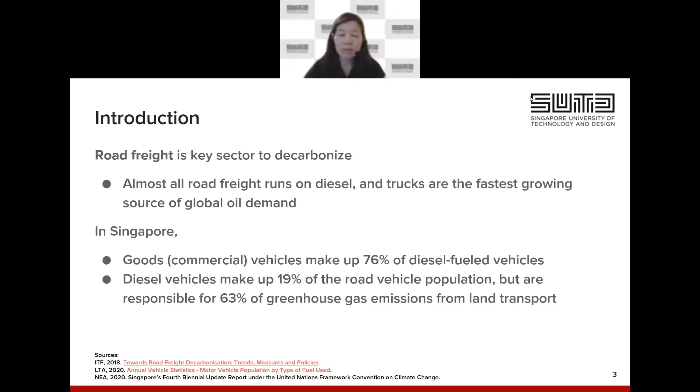In Singapore, commercial vehicles, or goods vehicles as we call them, make up about 3/4 of the diesel-fueled vehicles, and about 19%, or 1 out of 5, vehicles in Singapore are diesel vehicles. Even though they're a small fraction of the total vehicle population, they're responsible for a significant portion of greenhouse gas emissions from road transport, about 63%. So we see an opportunity here. Can we think of alternatives to switch out the use of diesel for road freight? So that's what we're considering today.

So in decarbonizing road freight, I don't know if any of you are familiar with Singapore. It's a very small city-state in the tropics, just south of Malaysia, located in Southeast Asia. We aim to phase out internal combustion engines by year 2040. For passenger vehicles, I think this is quite readily underway. The movement towards electrifying passenger vehicles is really gaining momentum. But for medium and heavy duty trucks, it's much more challenging. There are not as many obvious alternatives, partly because of the high mileage and the payloads that they have to ferry. So the impacts are not yet fully well understood.

There are studies looking at hydrogen fuel cell trucks as one of the alternatives, but there are not that many of them. And even the studies that exist maybe only focus on some aspects of the entire life cycle of the vehicle. So we see a gap here that I think deserves some attention. We also understand from existing studies that life cycle impacts of these alternatives tend to be very context specific.

So we do need to look at the specific use case, the market that these vehicles are in, how they're used before we can make a proper assessment. So here, some images on the slide right now show the battery electric concept vehicle on the left, as well as a hydrogen fuel cell vehicle on the right, both by Mitsubishi, just to demonstrate what it can be like if we were to replace conventional internal combustion engines with these alternatives.

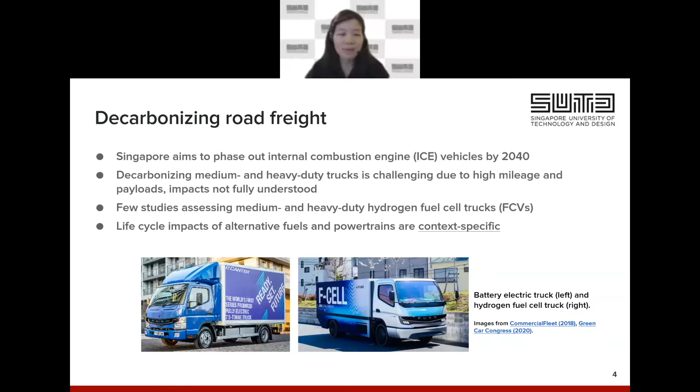So we take on a life cycle approach. And so what is a life cycle assessment? Some of you may already be familiar, but just to recap, it's a tool to help us look at the environmental impacts of a product or a system or a service throughout the entire life cycle. So we will be accounting for all life cycle stages from the raw material processing to producing the product to distributing it, using it, and then dealing with it at the product's end of life.

So this life cycle perspective is helpful because it helps us to look at the impacts of alternatives relative to baseline or the best practice today. And we take that approach because we are interested to avoid the issue of problem shifting or creating new problems as a result of the introduction of an alternative.

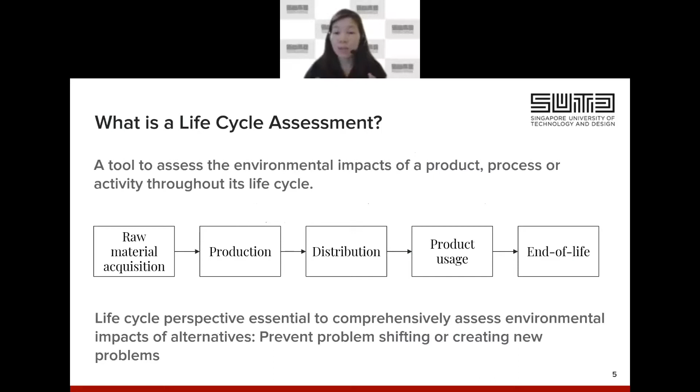So the ISO has come up with a framework for how life cycle assessments can be conducted. It usually begins with a goal or a scope definition where we define why are we doing the life cycle assessment, who does it serve, what should we include or not include within the scope, and then after that, a very careful inventory analysis. So inventory analysis would account for the material inputs or resource inputs into all the different life cycle stages that's considered within the scope. What are the emissions? What are the wastes or byproducts? Or what is the end product?

And then some inclusion of the impact categories to consider. So for today's topic for the trucks, we're looking at greenhouse gas emissions, which concerns climate change. But there are many other impact categories like impact on human health or ecotoxicity. So there are different categories that we can think of for the specific study of interest. And then throughout that, we will be interpreting the results and again, considering who is the audience, what purpose does the study serve, be it for design improvements or for policy making, for marketing, and so on.

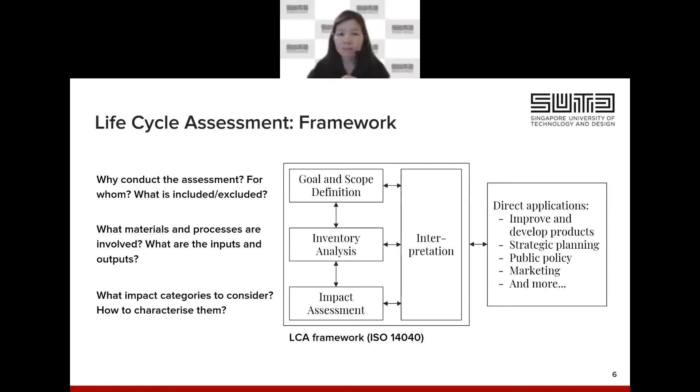So for the purpose of our study, which is to look at greenhouse gas emissions for trucks, these are the alternatives that we will be considering. We're looking at the conventional diesel, and we'll be comparing hybrid diesel to that, as well as a battery electric truck and hydrogen fuel cell truck. So we've actually selected these alternatives because we think they're the most promising in Singapore's market. So we did not consider others like, for example, natural gas CNG vehicles or biodiesel. And then again, we're looking at these medium-duty trucks weighing about 3.5 to 7 metric tons.

We're looking at the case of Singapore, where it's a very dense urban environment. We don't really have a lot of renewable energy sources available, so a little bit constrained in that context. We will be measuring the greenhouse gas emissions on a life cycle basis on a per ton kilometer metric. So this is per ton and kilometer traveled, right? So this is the utility or the service that the trucks will be performing.

In terms of data, the life cycle assessment studies are very data hungry. So we will be using existing LCA databases such as GREET that's offered by Argonne National Lab. We'll be using some of the information from existing literature, past LCA studies. Wherever available, we'll try to use the local data. The figure on the right shows the scope that this study is undertaking.

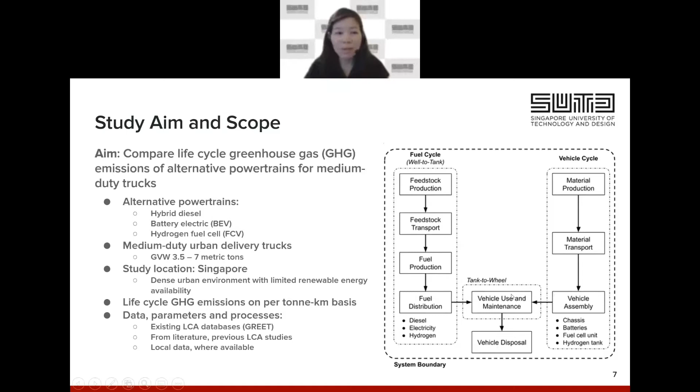So when we think about trucks, it's bringing together actually two products. You have the fuels that have to be produced, and it goes through a chain of activities, like the feedstock has to be produced, it has to be transported, and then eventually distributed, be it diesel or electricity, or the vehicle itself has to be manufactured, assembled, transported to the end user. And during the use phase, which is in the middle over here, or the tank to wheel portion, the vehicle is operating, it's being maintained, and then eventually reaches its end of life and will be disposed. So let me break down these three stages of the life cycle a little bit in more detail.

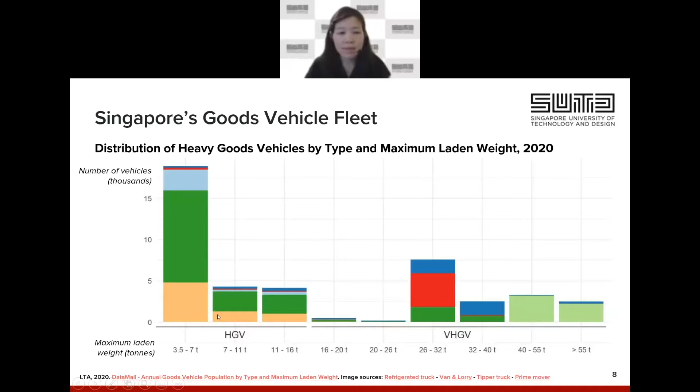So here's a distribution of the goods vehicles in Singapore by weight categories as well as the body types. So just wanted to set context that we're focusing on this part, the kinds of vehicles that's more prevalent in Singapore. So these are the ones weighing 3.5 to 7 metric tons, having a body type that looks a little bit like the one over here. So it's either open top or enclosed box kind of trucks.

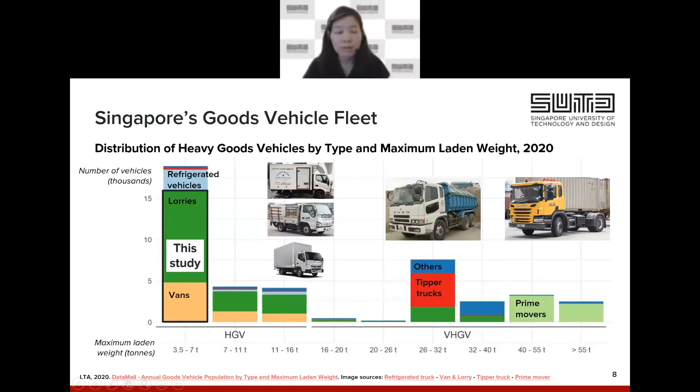So in terms of the vehicle cycle, this is the portion where we are looking at the manufacturing of the vehicle itself. The chosen body type is the Mitsubishi Canter, which is a very common heavy goods vehicle model here. Notice that in any LCA study, again, for your context, you'll be looking at the typical vehicle types. We've selected equivalent models for each powertrain of interest, so this would be the hybrid electric vehicle as well as the fuel cell vehicle.

For a fair comparison, we've made sure that the specifications and the configurations of these vehicles are similar, so similar power output and performance across these alternative powertrains. And during the modeling process, we assume that they're carrying the same payload. Greenhouse gas emissions are emitted during the vehicle cycle when we're manufacturing the vehicle. You can also get credits when you're recycling the vehicle when it reaches its end of life.

So we'll have to account for all the key vehicle components like the body of the vehicle, the battery for the hybrid or the electric vehicle, the fuel cell unit, as well as the hydrogen tank for the fuel cell vehicle. Most of these emission factors are obtained from the literature where available, such as, for example, for battery capacity, the kilograms of CO2 equivalent emissions per kilowatt hour of battery capacity. So we'll have that factor and we'll account for that based on the specifications that we've chosen.

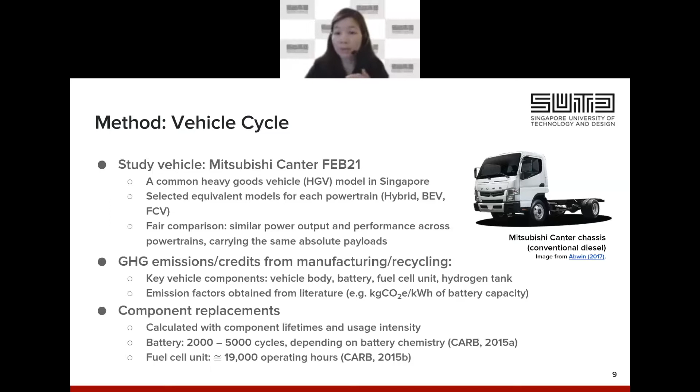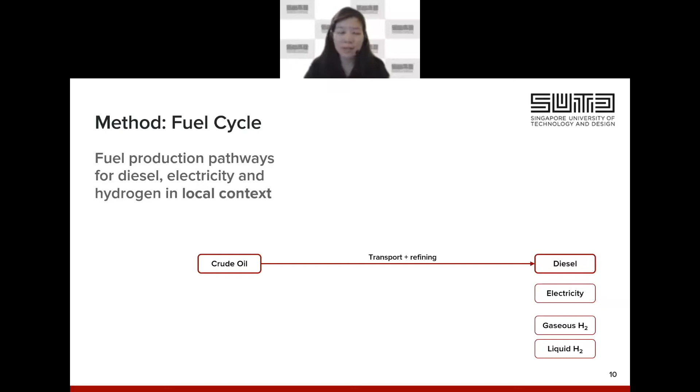For the fuel cycle, we need to break it down further into the different pathways, again, depending on the powertrain that we're looking at. Diesel, electricity, or hydrogen have to be produced. So let's look at diesel first. Crude oil has to be extracted, transported, and refined before it eventually becomes diesel that we can use at the pump for the trucks. For electricity, in Singapore's case, the electricity grid is very heavily reliant on natural gas.

So still predominantly fossil fuel based, but it's a cleaner form, natural gas. More than 90% of the electricity now is generated by combusting natural gas in these combined cycle gas turbines. This natural gas is either piped into the country or shipped in through liquefied natural gas terminals.

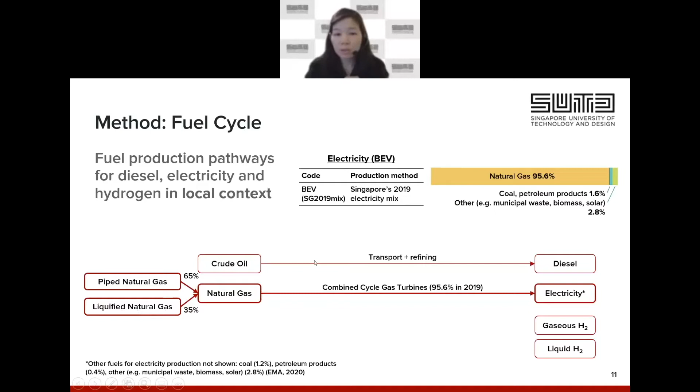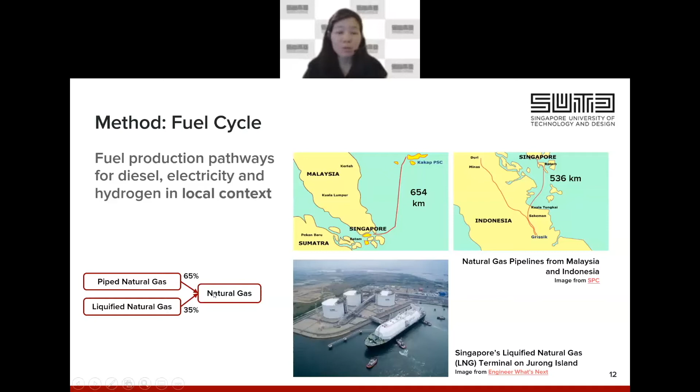So let me show you the next chart that shows Singapore is located here in the southern tip of the Malaysian Peninsula. The gas can be either piped in from neighboring oil fields in Malaysia or Indonesia, so these pipelines run hundreds of kilometers into Singapore, or shipped in through these tankers like you see in the bottom figure over here. Liquefied natural gas accounts for about 1/3 of the natural gas that we use to generate electricity. About 2/3 comes from pipes.

If we look at hydrogen production, the most likely fuel pathway that it will pursue will likely be steam methane reforming, which is how most of the hydrogen produced now is made. Steam methane reforming involves producing hydrogen from natural gas, and the overall reaction results in both hydrogen production as well as CO2 emissions. It's known as gray hydrogen if it's still produced using fossil fuels.

So we could have this pathway shown at the bottom where hydrogen is produced through SMR and then subsequently compressed into gaseous hydrogen, or compressed and then liquefied to liquid hydrogen. Okay.

We also inserted one fuel pathway which is reliant on renewable energy. We thought that this would be interesting to illustrate the full potential if we were able to decarbonize our electricity grid and then rely predominantly, actually entirely, on renewable energy. Solar is the most promising option for renewable energy in Singapore, so we've inserted this solar possibility here. Solar can help produce electricity or can help with hydrogen production as well.

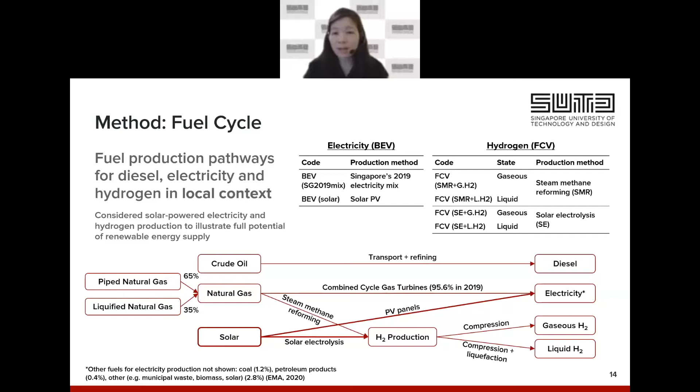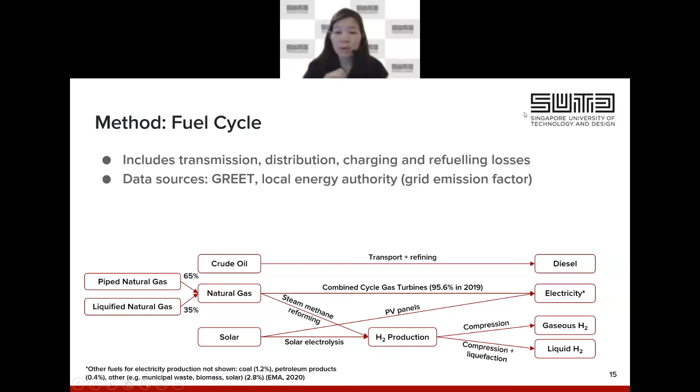For the fuel cycle, we've also accounted for some of the losses that might happen during the transmission, distribution, or refueling. And then we've used some of these factors of losses from existing data sources like GREET or the local energy authority to reveal to us what's the grid emission factor. So that's the CO2, kilograms of CO2 emitted per kilowatt hour of electricity produced. Right, so that was the fuel cycle.

So let's look at the use phase, also known as the tank to wheel impact. Here, the first thing we did was try to construct a representative drive cycle for Singapore trucks. And we did this by making use of some engine data that we managed to collect from 5 trucks that were making urban deliveries, retail deliveries actually, in Singapore in 2015. So we made use of a data logger called an onboard diagnostic logger that you can plug into the OBD port within the truck and then extract out the engine data.

Very high resolution, second by second engine as well as GPS data was collected. This helped us to extract the trips that were made by the trucks during the times that they were tracked. And then we managed to aggregate all the trips that were monitored into a representative drive cycle that reflects the kinds of operations that the vehicle goes through in Singapore. So again, you can see how we've tried to bring in the local use and the context for which the trucks are used in our analysis.

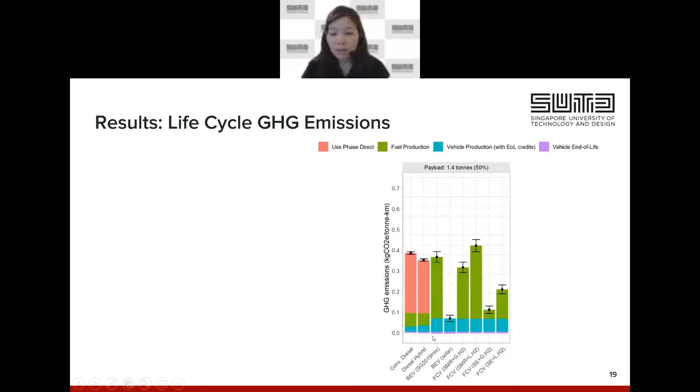One of the things that we can immediately see already from these results is that the fuel cycle is a really important part of the total emissions. So energy use in the use phase accounted for more than 75% of the life cycle greenhouse gas emissions based on the current fuel production methods. So it's really critical to consider, where's the fuel coming from? What can we do to decarbonize the fuel production if we wanted to decarbonize transport at all?

So decarbonized fuel production pathways have the lowest life cycle greenhouse gas emissions. So these would be the options which rely on things like the renewable energy sources. So the battery electric vehicle that's powered by solar power exhibits the lowest greenhouse gas emissions on a life cycle basis, as with the fuel cell vehicle that relies on hydrogen that's produced using solar, right?

So this was done for an average payload of 50%. We did the same calculations for different payload levels. You could have payloads at 25% or payloads at 75%, and then the greenhouse gas emissions, again, on the per ton kilometer would vary accordingly. But we didn't see much variation in the relative positions of the alternatives. So it's just the quantum changes, but the relative rankings of these alternative powertrains do not change too much. Yeah.

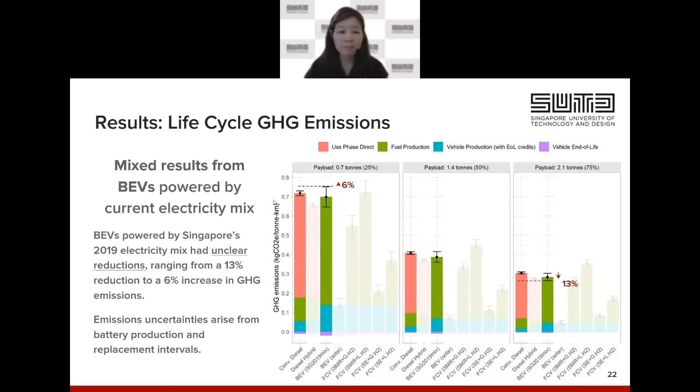So much of this uncertainty arises from the battery production impacts, as well as the replacement that might be needed to sustain the use of the vehicle over its lifetime. If we were to use fuel cell vehicles with liquid hydrogen and using steam methane reforming, it actually led to higher emissions. So it's not that positive if we're looking for gains in reducing climate impact. This option was not too attractive. Yeah. So you can see how LCA helps us to sort of suss out which alternatives might work and which ones might not.

We also looked into break-even mileage. So this is the distance that the alternative powertrain vehicle has to cover in order to have a lower greenhouse gas impact compared to conventional diesel. We find that most of these break-even mileages would take place below the average lifetime mileage. So if you recall, that's about 388,000 kilometers. That's the average lifetime mileage, which is indicated as dashed lines over here.

So these charts show the lifetime mileage on the horizontal axis, and on the vertical axis you have the lifetime greenhouse gas emissions. So the gray line here is that for the conventional diesel, and then the alternative powertrains are shown in the colored lines, along with the error margins for the uncertainty that we try to account for in the data.

So for diesel hybrids, the benefit sort of grows as you travel more using the vehicle, and the break-even mileage, you hit that around 52,000 kilometers, right? So fairly quickly, we can see that this vehicle can achieve lower greenhouse gases compared to the base case. For battery electric vehicles, it's not so obvious. There's only a slight advantage over conventional diesel, considering the range of uncertainty, as we had seen earlier just now.

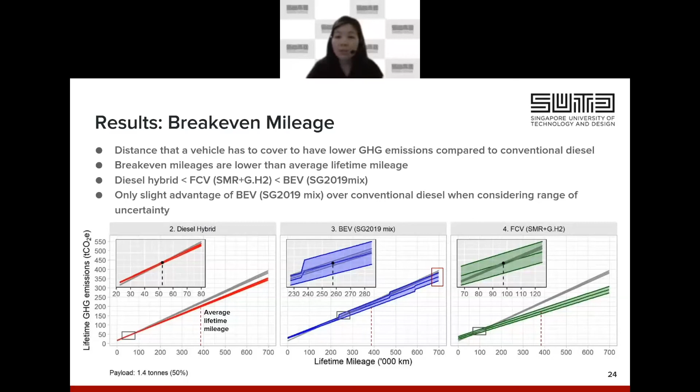So we arrive at some of the policy recommendations now. So we see that if we really wanted to decarbonize transport, you cannot avoid examining the accompanying grid or fuel production that's associated with whatever powertrain we're considering. So decarbonizing the upstream fuel production is critical to achieve a lower carbon transport future. If we had limited renewable energy options, like in Singapore's case, I think fuel cell vehicles using gaseous hydrogen, steam methane reforming, as well as diesel hybrids are potential options.

Now, fuel cell vehicles would require a lot more investments, right, in the infrastructure to make it available. The market must also be ready before we can deploy this at scale. But it can offer higher greenhouse gas emission reductions, up to 25%.

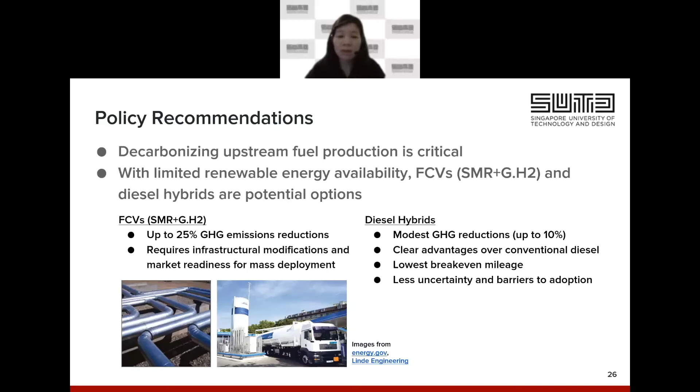So diesel hybrids, maybe less uncertainty involved, maybe less barriers to adoption. You can very quickly switch your fleet to diesel hybrids. They offer the lowest break-even mileage, a clear advantage compared to the base conventional diesel that we're considering. Modest greenhouse gas emission reductions, though, only up to about 10%, but it seems like a straightforward option that many can consider already.

So it seems like we really need to think about cleaner technologies for heavy vehicles. There's a lot of research already underway to think of what these alternatives can be, but we need to have more trials. We need to have some technology pilots, some demonstrations, both involving the research community as well as with industry. I think this will really help push out some of the alternatives that we can consider for these larger vehicles. Most of these technology options are now at the very early stages of development, so we do need to start thinking about investing in them.

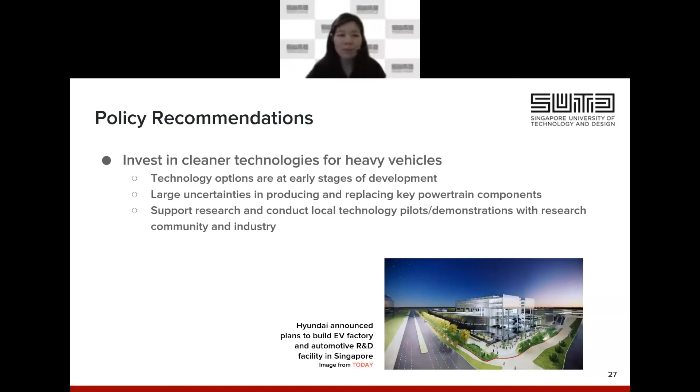This is one of my last few slides already. I think we're also just at the tip of the iceberg. Today I spoke about life cycle greenhouse gas impacts for this specific segment of road freight. Of course, there are many more impact categories we can consider other than climate change. Life cycle costing was not something that I had addressed yet. Recharging and refueling infrastructure is also part and parcel of considering these alternatives. There's a lot of developments with the electricity grid also and potential for carbon capture. So many new technologies and alternatives are being considered aside from the ones that I have described.

So future work, we hope to look more into what's called prospective assessment. So not just look at today's situation with today's grid and what are the options in the near term, but we can imagine what the future possibilities might be and account for these future developments in our assessment. So for example, with more carbon capture, what might it be like with a regional power grid that offers more renewable energy options? Maybe that can help us decarbonize also.

For trucks, I think I've already described the importance of looking at the use phase and the different contexts that they are used in, but we know that trucks are used by so many different industry sectors in such different ways. So I think it helps for fleet owners to look at the different operations that they are subject to and how that might influence the decision as to which alternative works the best for your fleet.

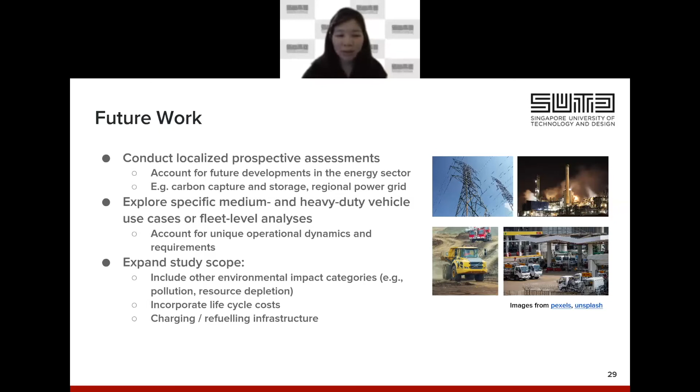So we need to think about that too. Life cycle costing would be of great concern for many fleet owners before they are willing to consider switching to these alternatives, and then again rolling out the availability of infrastructure to accompany these alternatives.

So key takeaways, this is my final slide. So I hope you take away 3 things with you today. Life cycle perspective is really helpful to assess the overall environmental impacts more holistically, and we want to avoid problem shifting. So this LCA is a helpful approach.

There are many different alternative fuels and powertrains that can potentially help us reduce our greenhouse gas emissions to meet our climate change goals, especially in road freight to consider, but it has to be coupled with decarbonizing the energy system. So these two have to happen in parallel.

And the third key takeaway I hope you bring away with you would be to consider that the diversity of new technologies are available, but they're best studied within the context that they are deployed in. So we really have to look at, again, the use context, the market that they play in, the availability of the fuels in the market that you're in. I think this helps us arrive at feasible solutions much quicker.

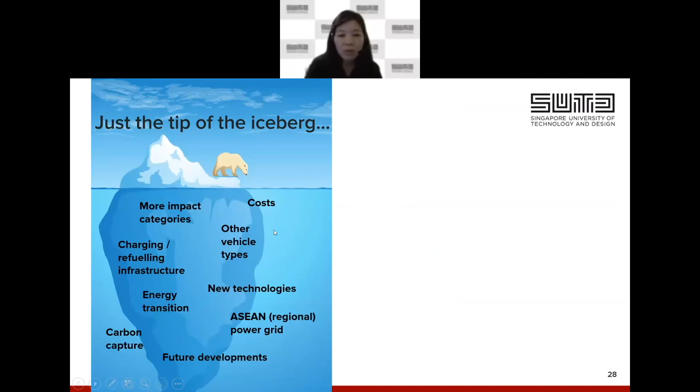We have a question from Dan. Hi, Professor Cheah. Thank you for the informative presentation. I would like to ask if the speed is assumed constant. Thanks, Dan, for the question. So actually, we tried to account for the variation in the speed that was observed in the trucks. So go back to the slide that shows this speed time trace at the bottom right.

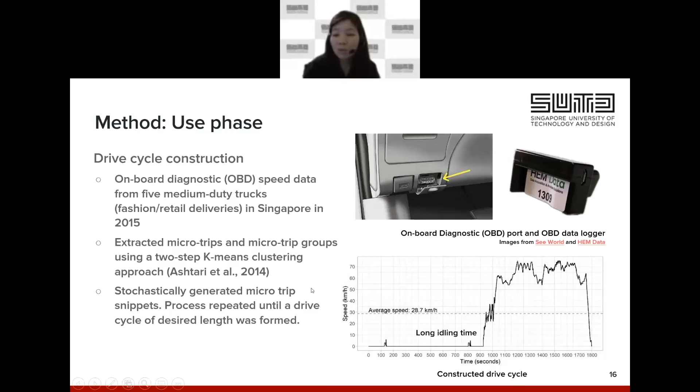Through the use of the data logger, we were quite fortunate and were able to collect a lot of detail from the engine, so the engine status and what speed the vehicle was traveling at. This variation in the vehicle speed was accounted for in the construction of a drive cycle here. So we can see how speed varies, accelerates, maintains a certain high speed and then decelerates eventually. This was subsequently used in our energy consumption model that accounted for these variations in the speed and therefore the total energy required to overcome the drive cycle. So speed was not constant, and the variation was accounted for. Thanks, Dan.

We have a question from Mackenzie. As for alternative powertrains, you mentioned the hydrogen fuel cell truck as well as hybrid diesel. You've shown some comparative percentage for the best emissions. Could you reiterate which type of powertrain you think would show most promise of usage and efficiency? Yeah, great question. So which one was the best? Which one should we consider? Which is really the point of the study, right?

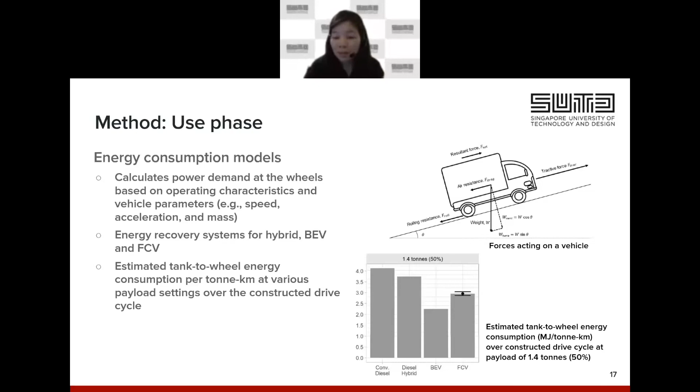So in terms of energy efficiency, we're on the right slide, because this chart on the bottom right shows the energy consumption in megajoules per ton kilometer hauled by the truck over the drive cycle that I just spoke of. The battery electric vehicle actually offers a lot of efficiency over the use phase compared to conventional internal combustion engines. That's why EVs are so attractive, right? But if we were to look at the overall life cycle impact, on that slide, the alternative that seems most immediately viable, maybe easier to adopt by many fleet operators, might be the diesel hybrid. There's a second bar over here, which offers, as I mentioned, 8 to 10% reductions in greenhouse gas emissions overall.

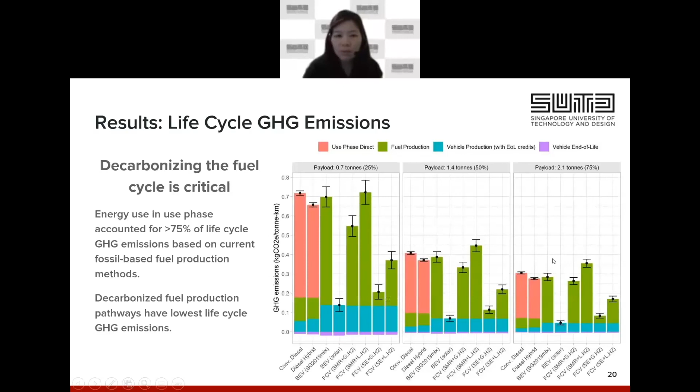So it's a subtle difference between energy efficiency versus greenhouse gas reductions. If we're looking for greenhouse gas reductions, 8 to 10% can be achieved with hybrids. And when we're thinking about today's grid, today's methods of producing hydrogen and so on, the fuel cell vehicle with gaseous hydrogen using current production methods can also get further reductions. Let me see which slide showed the reductions. Was it this one? This was the one that showed the net benefits of both diesel hybrids and fuel cell vehicles using gaseous hydrogen. All right, thank you.

Yeah, that was a very interesting study and great results.